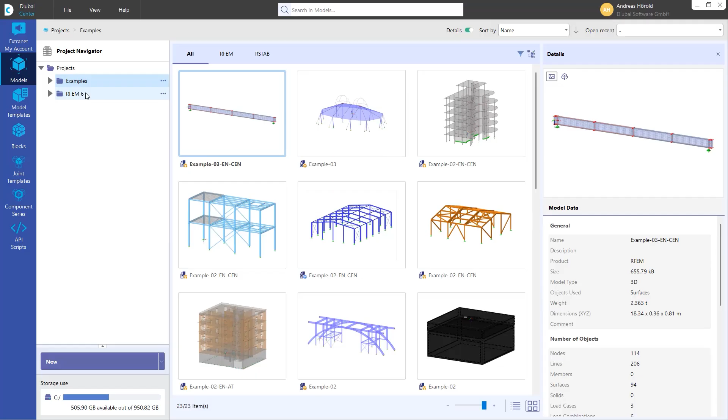Okay, then let's start with the first question. The first question is, how do I organize my projects? I can organize my projects in the Dlubal Center. The people who already work with RFEM 6 know that. I would like to give you some tips and an overview how you can work with the Dlubal Center and news we have implemented in the Dlubal Center. Let's start with the models, the most important tool in the Dlubal Center to organize your projects.

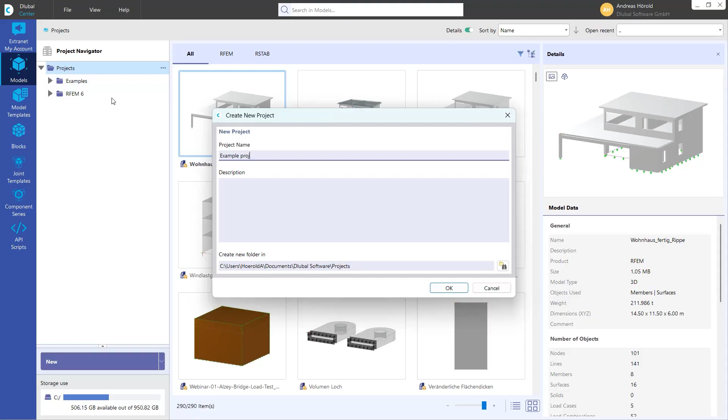Let's create a new project with a right click to projects. I can create new project. Let's call it example project. Okay, that's the new project. And I would like to create a sub-project. Again, right-click to example project, then create new project, and the new project should be model house 1. I can add description here if I want.

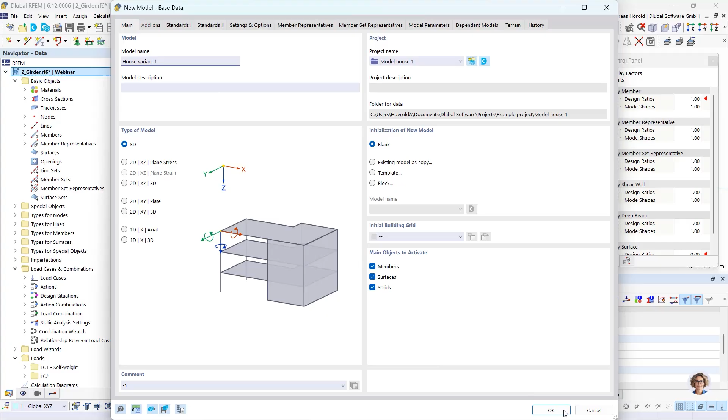So then, again, a right-click to model house, and I create a new file, RFEM model in that case, and I call it house variant 1. Okay. Turn back to the Dlubal Center. Then you can see the file here.

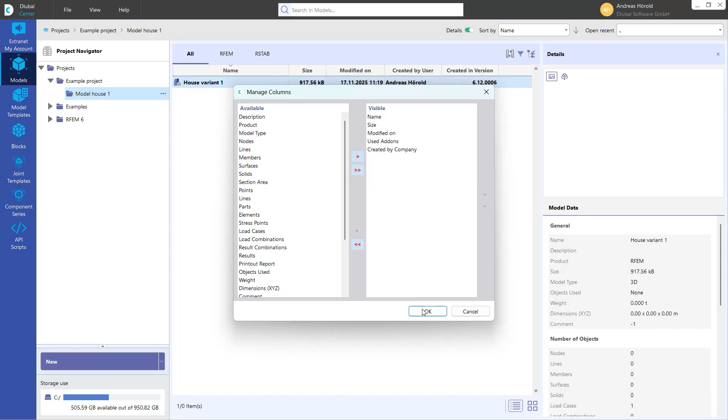And if you switch to the list, you can add different columns here. For example, created in version, created by user, or I can remove them with a double click and can add used add-ons or modified by company or created by company as you want. Different types are available. Now you can see the added columns here.

Okay, then I can open, for example, for the example project with a right click the folder location, and the Windows Explorer was opened. And I can create a new folder also here. So with a right click, new folder, and I call it model house 2. Okay, I decrease it a little bit so that we can see both.

Okay. And now I can do a right click to this example project and select connect folder as project. And I select this Windows folder. Okay. And now there are 2 sub-projects. That's another possibility to create a project. Then I can also do a right click to model house 2, for example, and select disconnect. Then the project was deleted here, but not in the Windows Explorer. It's also a small tip for you. It remains here. Then other features: delete, that's clear.

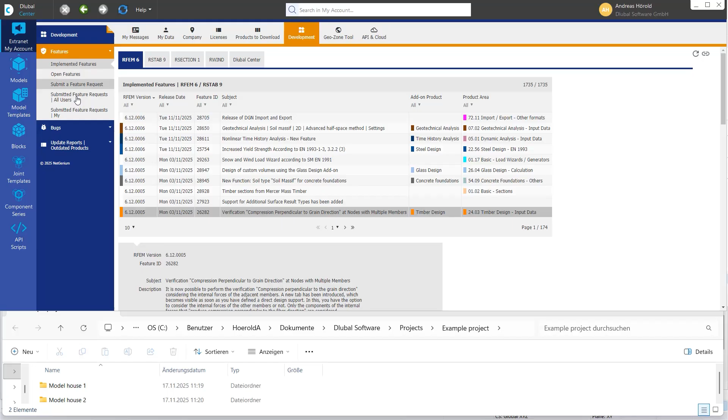Let's turn to the extranet and my account. You can see the extranet messages here, or what's quite important, the development. You can see implemented features in a certain add-on, for example, or you can select all, then you can see all implemented features. You can see open features for certain products or all products. Then you can submit a feature request, and maybe it will be implemented in the future.

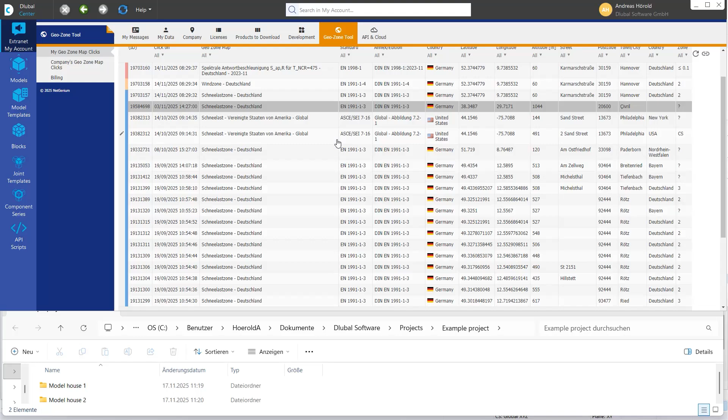Then, for example, you can see the Geo-Zone Tool requests. Those are my requests in the past. Then the API and cloud. Those are calculations from my side from the past. Then you can see here the data of you and of the company, your licenses, and so on.

Then we turn to the models and templates. The model templates category in the Dlubal Center provides an overview of the models you have saved as template files. In my case, it's empty. And an important message: the save as template function in the file menu in RFEM allows you to save your current model as a template.

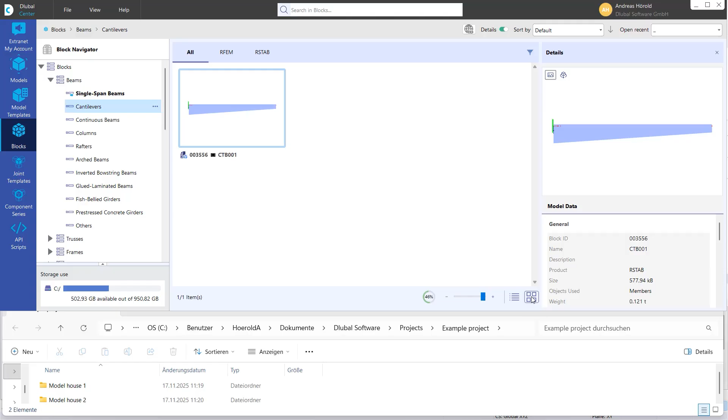Then you can see the blocks. Those are parameterized, and most of the models where parameters are implemented. Let's go to this view, the tiles.

Simple models and more complex models, for example, curved surfaces and so on, concrete structures. A lot of blocks are available. Just use them. That's quite easy to handle.

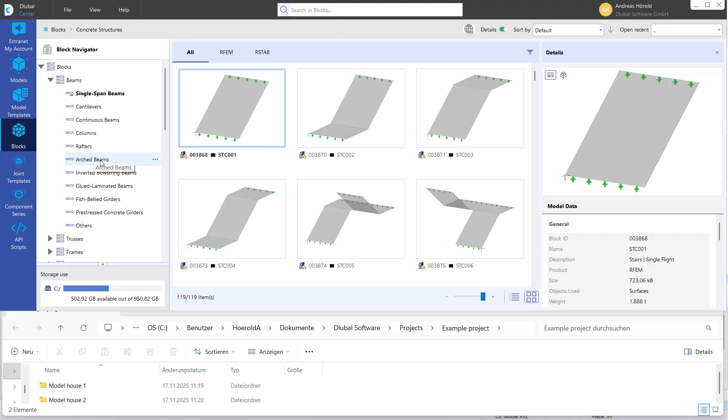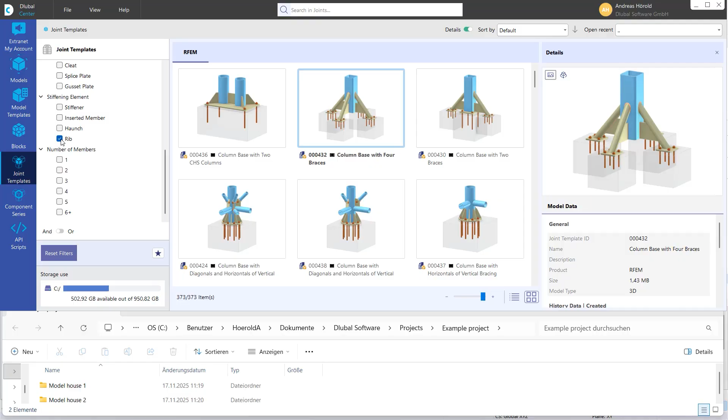Then the joint templates. You can select certain templates of joints. You can use them in the add-on, also in the Steel Joints add-on, for example, also number of members, or joints with ribs, cleat, and so on.

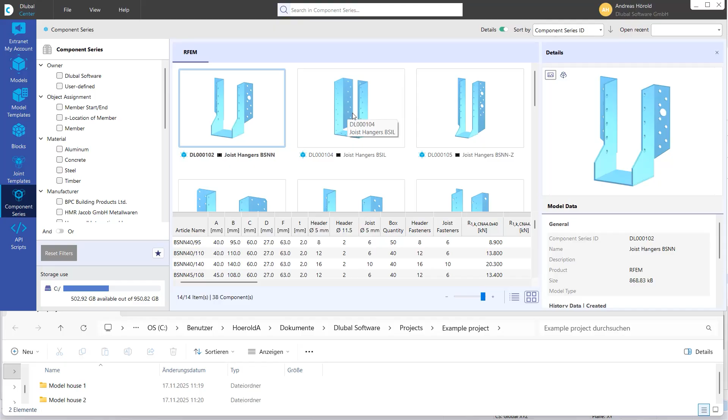Then that's a quite new part of the Dlubal Center, the component series. We are in the development of the new add-on components. It's currently in alpha version, meaning it's in preparation, and in the future you can use the values of such joints and compare your internal forces with the maximum forces of the joint.

And API scripts, there are already sample scripts that you also can use for your project. Okay, that should be all for this question. Let's turn back to RFEM.

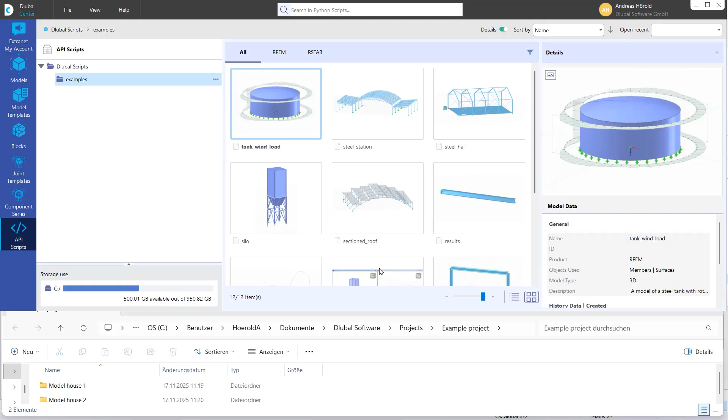The next question is, can I design longitudinal fillet welds according to Eurocode 3, Part 1-8 in RFEM 6? Yes, that's possible now. Soon we will release that feature, and I can show you how to do that. I've prepared a simple single span beam here made of a cross-section HE 180A. Imagine you need to use a girder with a maximum height of 175 millimeters.

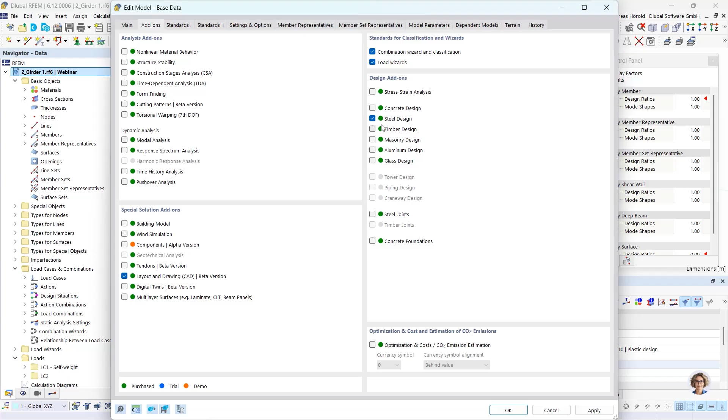It's not possible, as you can see on the design ratio, with the HE 180A, and it's also not possible with an HE 180B. That's why we create a welded cross-section. At first, I go back to the base data. It's necessary to activate the steel design for that feature.

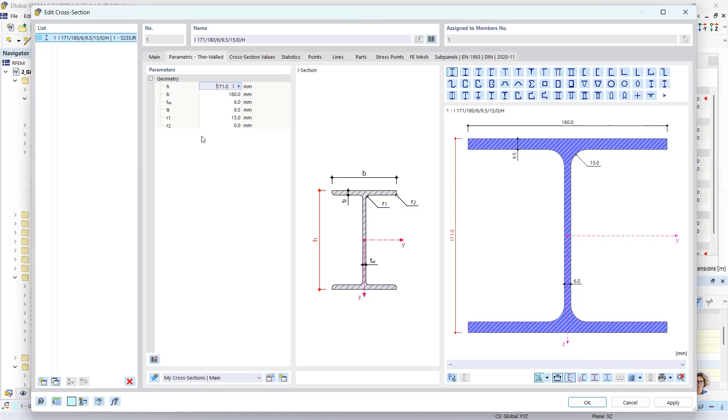Then we create the welded section. I edit this used section. I turn to the library above and I select welded I-section. Before I enter the geometry, I go back to the main section, and I select here welded. Okay, then I enter the parameters. Maximum height should be 175 millimeters.

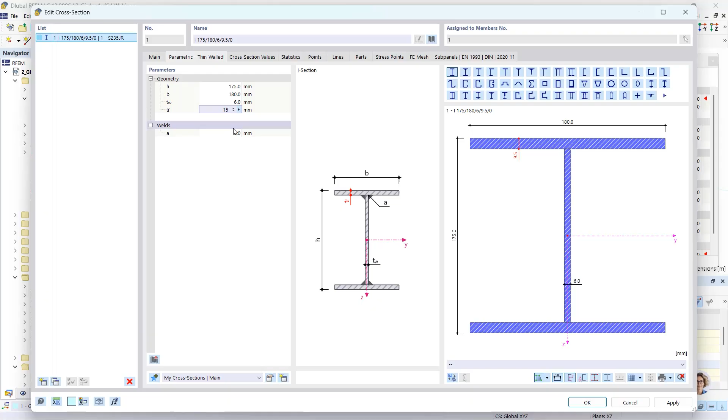The other values can remain, but not the thickness of the flange. It should be 15 millimeters, and the weld should be 3 millimeters. Okay. Then I have to activate the weld design.

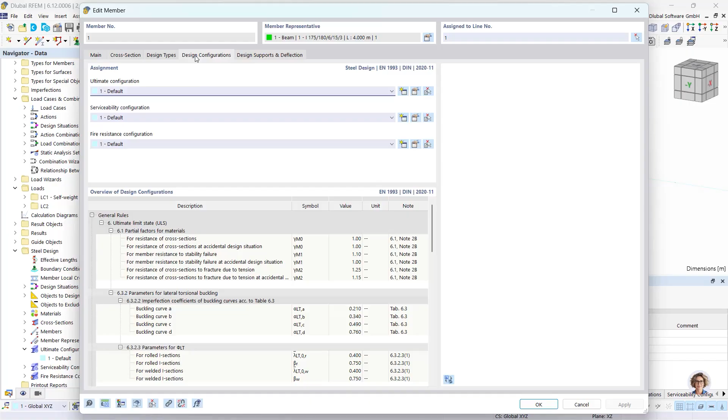I turn to the navigator data, then steel design and the ultimate configurations, Default. I can turn to that chapter also when I double-click on the beam. Then the design properties are activated and I can find the design configuration here, and I can edit it with that button. Then I have to activate the design of the longitudinal fillet welds.

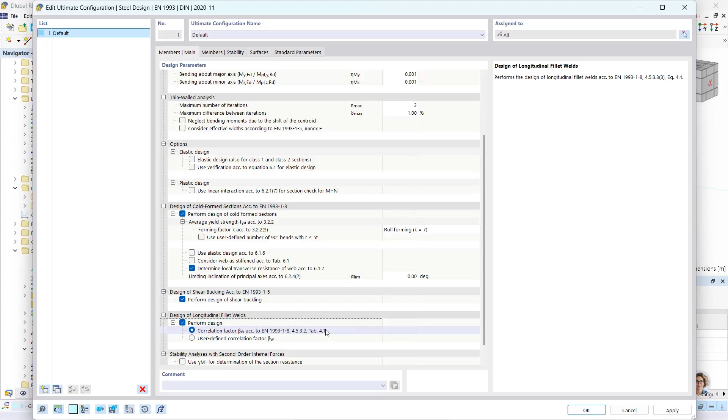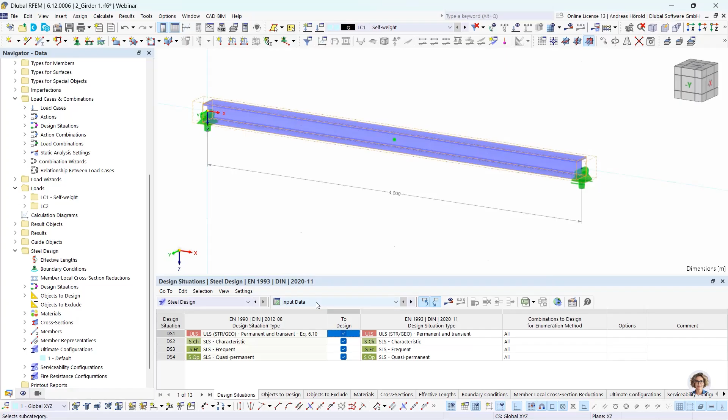The correlation factor should be determined according to the Eurocode. It's dependent on the material, and in our case it should be 0.8 because we have a material S235. If you want, you can also use a user-defined correlation factor. In most cases, we will use the automatic determination according to Eurocode. Okay, so then I start the steel design again.

The combinations are calculated in parallel. Let's turn to the design ratios on members. You can see there's an error. If I double-click on the line, the details are opened and you can see the throat thickness of one or more longitudinal fillet welds is smaller than the limit according to Eurocode 3.

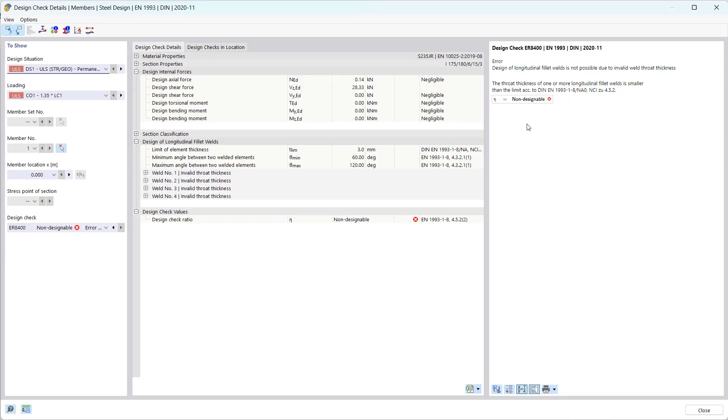Now the program checks that automatically. In that case, the weld is too small, and we need to increase the weld. So I turn back to the navigator data, double-click on the cross-section, and increase the weld to 4 millimeters. Okay. Then I run the steel design again.

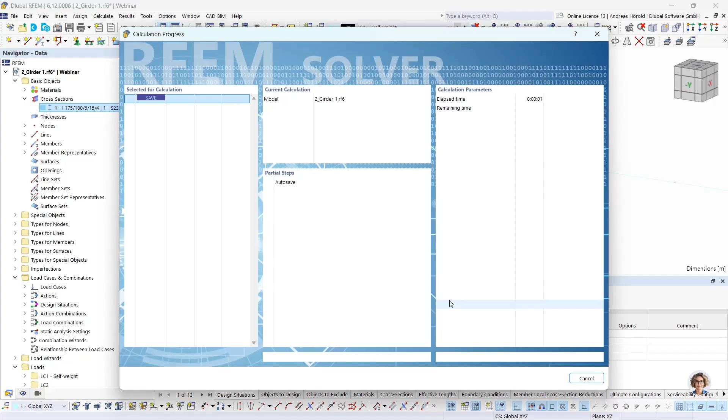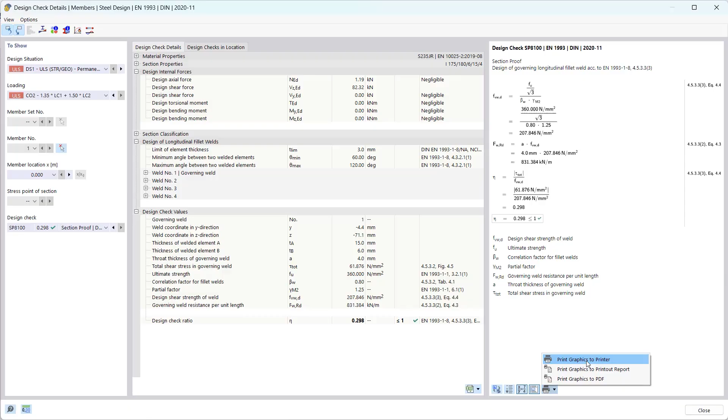And now the design of the weld is done. Double-click on it and I can see the design checks. We can find the 0.8 here, the correlation factor, then the thickness of the weld, and the design check ratio is approximately 30%. And of course, you can also print the formulas in the printout report. Okay, that should be all for this question and this model.

The next question is, how can I smooth results in RFEM 6? That's an often asked question. You can do that with a surface results adjustment. In RFEM 5, we called it average region. Such a surface results adjustment describes an area in the model whose graphical results are not represented by the actual diagrams, but as mean values. You can use a user-defined adjustment area to evaluate the smoothed surface internal forces.

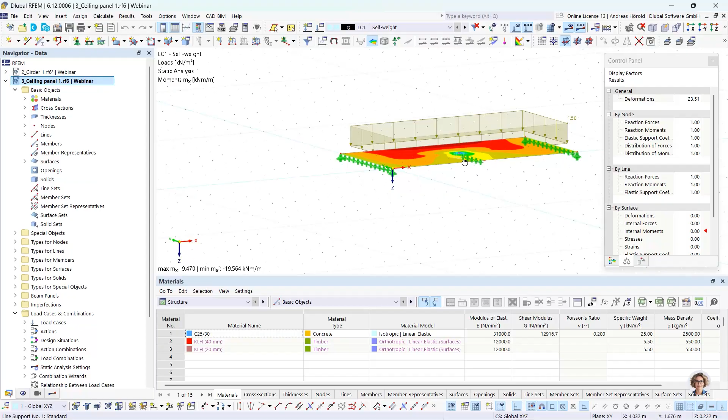You can see that ceiling panel here and a wall here. Imagine it has a thickness of 20 centimeters. And you can see there are singularities at the end of the wall here. We would like to use such a surface results adjustment to smooth the results.

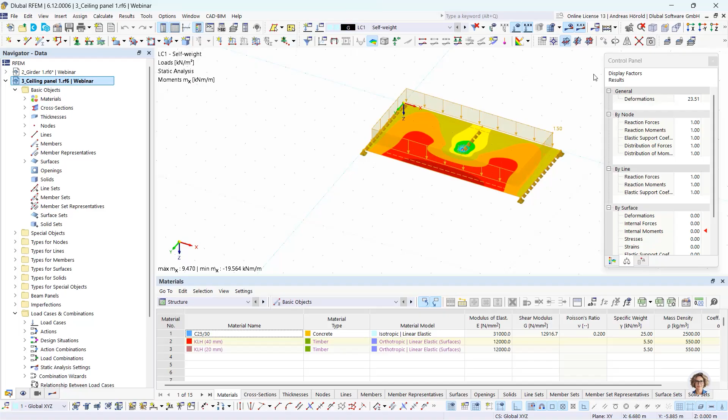To compare the results, I copy that ceiling panel, select all, then I use the move and copy function, create a copy, 6 meters in Y direction, and including loading. Okay.

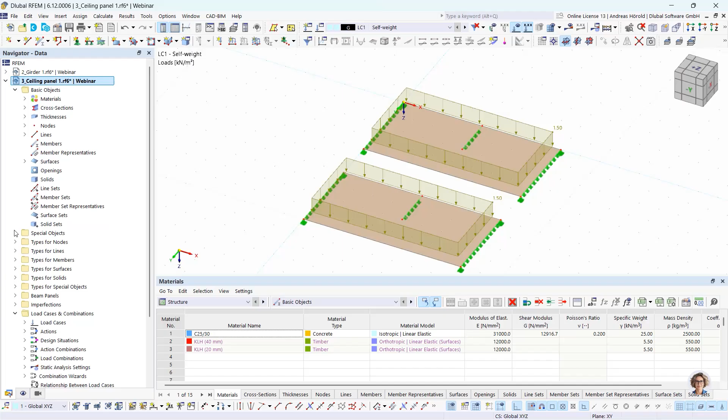So then I turn to the navigator data, and under special objects, you can find the surface results adjustment. You can also find them in the menu under Insert, Special Objects, Surface Results Adjustments, and I open the dialog box.

At first, I have to assign a surface. That surface, okay. Then you can select different shapes here: rectangle, circle, ellipse, and polygon. I use rectangle. The dimensions in our case should be 20 by 20 centimeters. And I select the node.

And to define the position correctly, I move it to 10 centimeters to depict the wall end correctly.

So, and then there are different adjustment types. The default setting is for direction u, averaging of mx, my, and so on, for basic internal forces in surface direction y. And the second line here is the default setting for basic internal forces in surface direction x.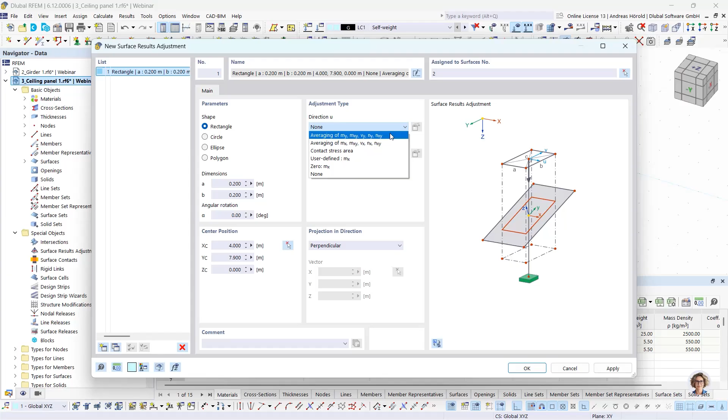So I use the default setting, press OK. And then we calculate all again.

And let's compare the internal forces for both slabs. The maximum value for both is 19.5 or minus 19.5 - the mx internal forces in that case.

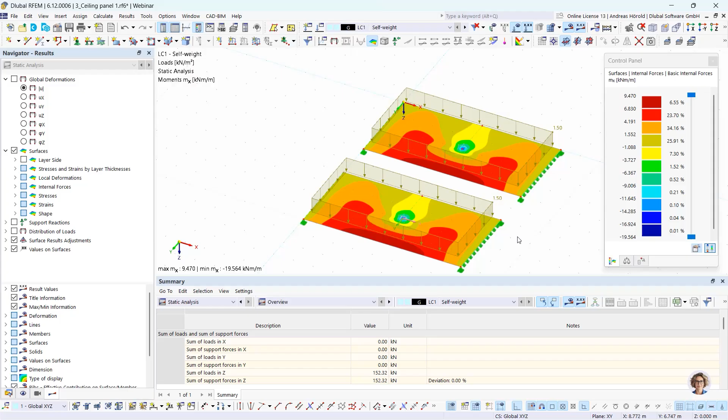And if I want to see what the maximum value is here, I can, for example, deselect that slab and hide selected objects. Okay, and now the maximum value is minus 16. That's the possibility to smooth results in RFEM 6.

Okay, those are the first three questions.

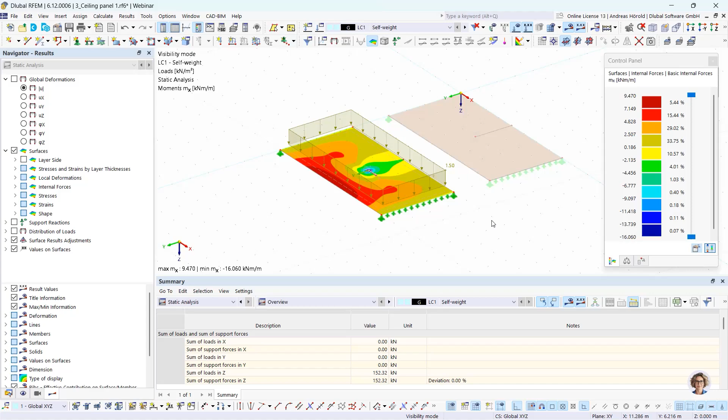Thank you, Andreas. I will continue with the next topic. The next question is: where can I find specific RWIND settings in RFEM 6.12 and later?

As you have maybe already realized, we changed the GUI in RFEM 6 a bit to be able to hand over more data to RWIND with the GUI in RFEM 6, without stepping directly into RWIND.

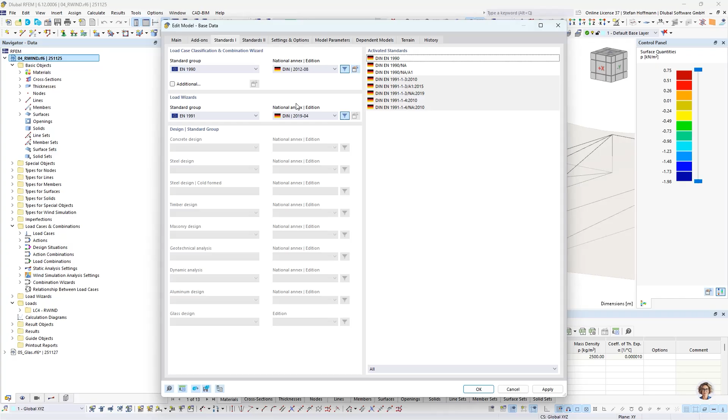Let's start with the basics. So usually at first you activate the add-on wind simulation, and you can choose the standard group for your wind profile in order to determine your automatic wind profile for your region.

If you're already interested in adding a terrain to represent your location-specific behavior of the wind, maybe by trees or some mountains, you can already activate a terrain in the base data terrain settings, and you can choose between no terrain, of course a horizontal plane, an inclined plane, some table values, or, as I am using, and this is most likely also the first change, an IFC file.

Model objects - this is no more found in the mesh settings to adjust the IFC as a terrain. You already input it as the base data in the tab of terrain. So I'm simply using an IFC file where I've modeled a simple shape of my terrain, and you can do some more inputs on the size of your terrain already here.

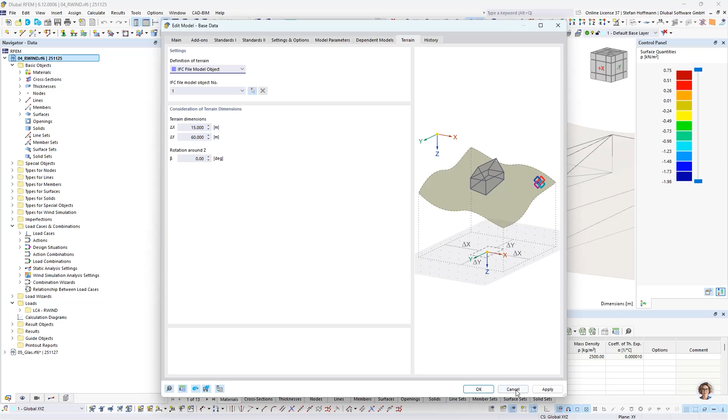So if we jump into the model, you are of course aware that in the mesh settings, you have a tab of wind simulation, and for the regular customers, you already realize that this tab has changed a lot from the GUI. So we moved some parts, and you now have the option to assign objects from shrink wrapping.

So the shrink wrapping mesh, which is later necessary for the calculation in RWIND, in order to be assigned to your main structure or surrounding objects. So you can already split it over here, but later on also in the objects. This is currently not in use.

You can as well choose to activate the terrain, which we set in the base data, to be considered for the calculation. You can also jump into the base data. You can moreover, as already known, adjust the level of details for your members. You can choose to close hollow sections. You can consider a surface thickness in general already, and the two known options to keep our wind results if the mesh is deleted, and or to run RWIND in the silent mode.

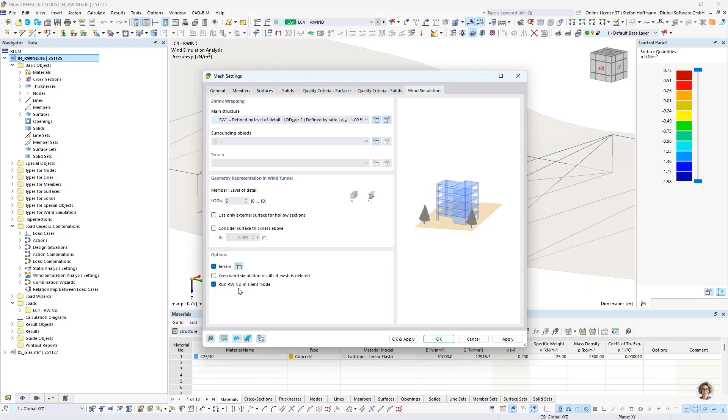As known, you also have settings in the load cases from the analysis type wind simulation. So if we jump into the tab, this has not changed, I think, a lot. You can assign wind simulation analysis settings, where you can, for example, differ between steady flow and transient flow.

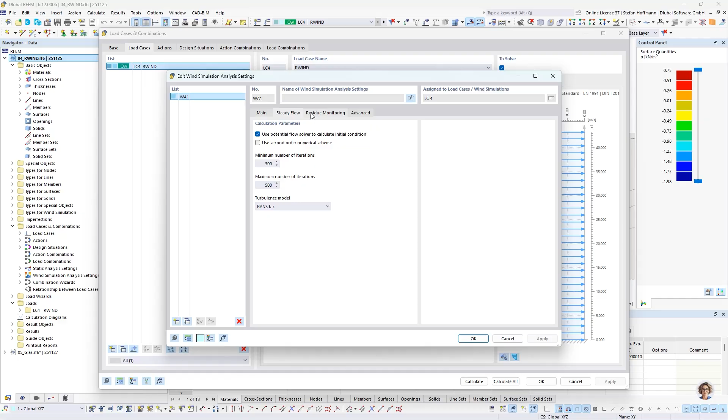You can hit some more options to be handed over to RWIND. You can also step into the tabs to add some more input for the wind tunnel. The wind profile did not change from my point of view, so you can simply assign a wind profile according to a standard and hand this over to RWIND directly. Some more checkboxes at the bottom. Everything is usually explained in more detail in our online manual.

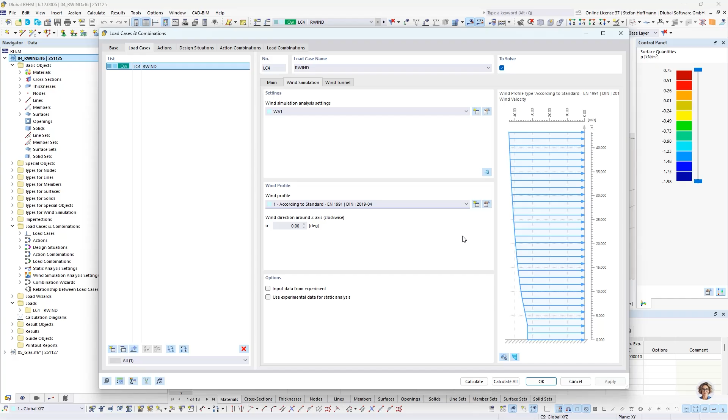The biggest change, in contrast to the mesh settings, is that now every object, if you click it, has a specific wind simulation setting which you can activate. You can see that you can now assign different shrink wrapping settings for surfaces. So if you have a small surface, you can assign an even finer mesh later on, because you're interested in facade engineering and results at that point. And if you have a bigger surface, which is not of as much interest, you can assign a coarser mesh.

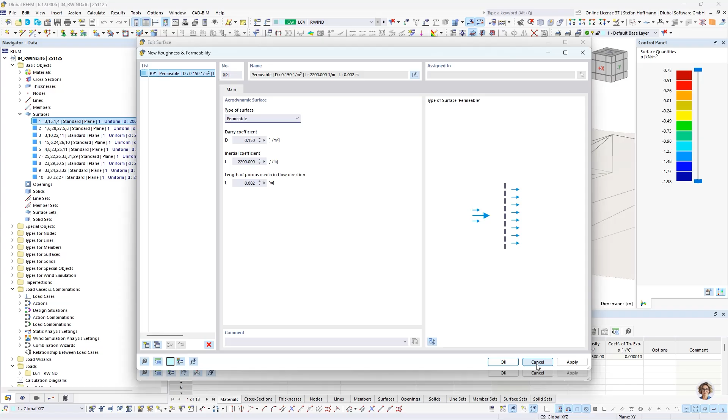You can also define the roughness and permeability of an object. As you may already be used to in our wind feature, you can use a closed surface and enter permeable options for it, so the mesh will not be fine but will be considered as permeability later on. You can also check to consider surface thickness, and another interesting option is that you can simply exclude this object from the wind tunnel.

What we did not change is that you still have your wind simulation analysis results, and you can still split to show it on the original model and/or the computational model.

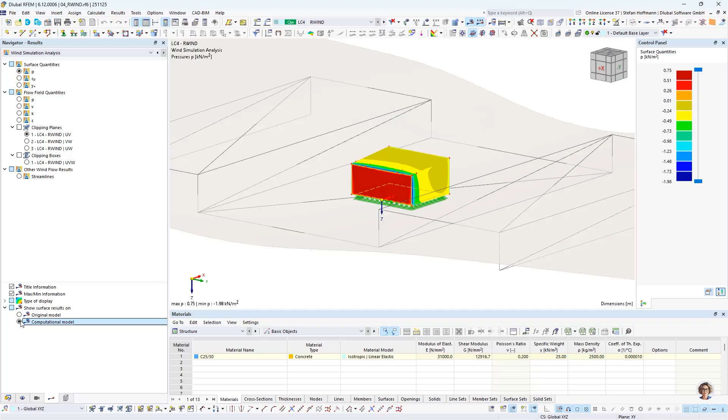We will step to the next question.

The next question is: can I control the shear coupling for laminated glass in RFEM 6? Usually, with laminated glass, shear coupling is of interest, because if you have a layered pane with two panels of glass and one foil in the middle, one worst case is that you do not take the shear coupling into account, resulting in big deformations and stresses only in the glass panes. But it might also be of interest, since we use laminated glass, to take the shear coupling into consideration.

Sometimes you are allowed to do this. With regard to the German standard 18008-1, it offers two requirements in chapter 7.2.1. It mentions that when determining the stress and deformation of laminated glass and laminated safety glass, favorable shear coupling between the individual panes must not be assumed. But in the next chapter, 7.2.2, in the case of unfavorable shear coupling, e.g. in the case of restrained stresses, full shear coupling must be assumed.

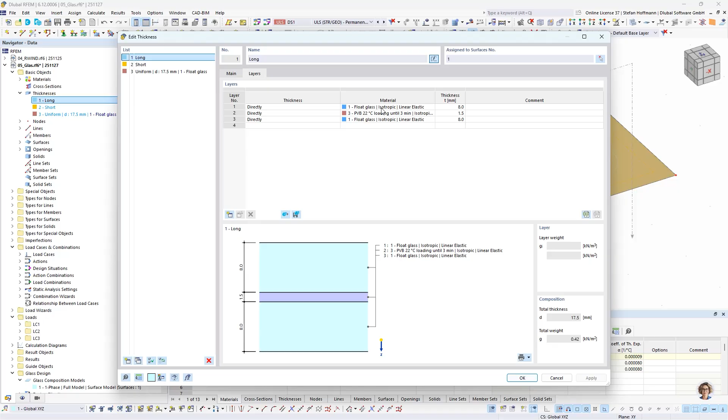First, a quick look at our model. It's a glass pane with 4 point supports, and I have created a thickness from the type glass composition. I have 3 layers: 2 times float glass, 8 millimeters each, and 1 foil in the middle. You can use the foil with material values from our material library. I'm using a foil with a load under 3 minutes, so the E modulus will already change for our foil layer. And this is my glass composition.

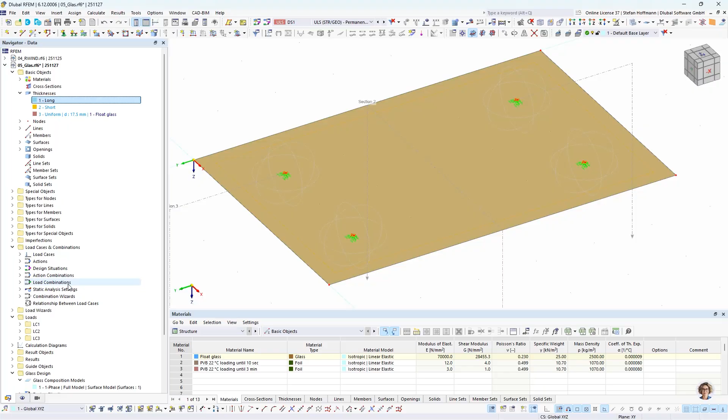For the calculation, you have to assign - or this is usually assigned automatically - a glass composition model, where you can later also choose a solid model to take into account insulated glazing. But currently you can differ between coupled and uncoupled shear coupling between the glass layers. I have defined uncoupled, so there is no shear coupling in my main model.

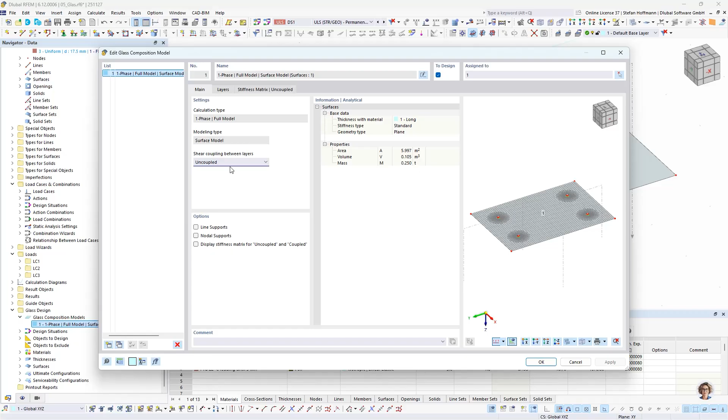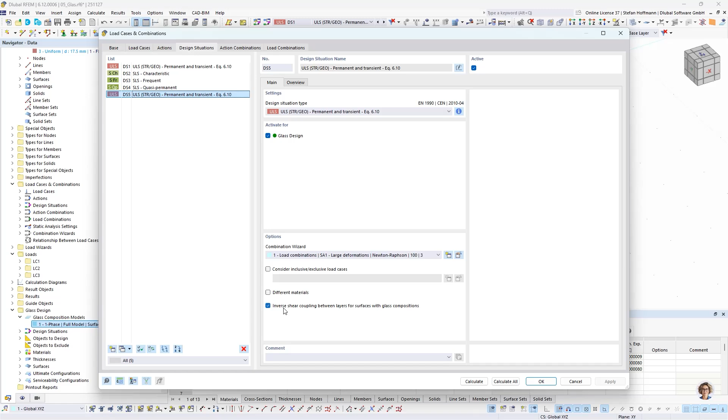So how do you consider both shear couplings? It's quite easy in RFEM 6. We do this by checking our design situations. Once you check glass design, you can see a further added option at the bottom of the design situations: inverse shear coupling between layers for surfaces with glass compositions. Remember, we have a glass composition model without shear coupling, so for every load combination in design situation 1, if we do not check this checkbox, this is uncoupled. We can simply copy this design situation and check this checkbox for the same load combinations, where we will then take into consideration the full shear coupling. Just by adding this option, load combinations will be calculated automatically.

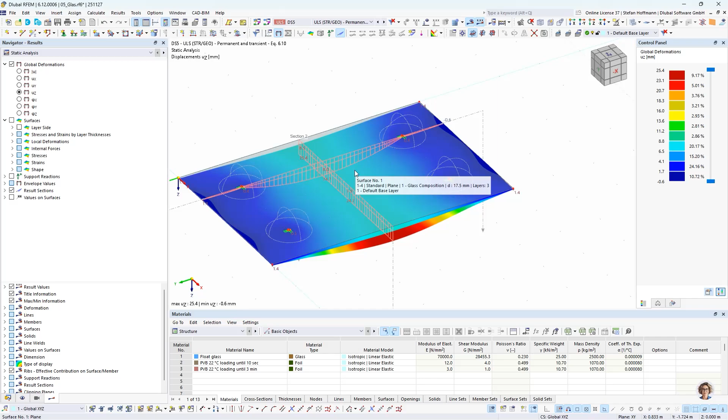Once we step into design situation 1, no shear coupling, we have a maximum deformation of approximately 50 millimeters. If we step into the one with full shear coupling, the deformation reduces as expected, related to the theory behind our 2D sub-stiffness. The most interesting part is, of course, the glass design. I have done 2 sections through the model, and we are above our design ratio, so we would have to adjust our model. But mainly, not taking into consideration the shear coupling, we would expect on point supports to have the biggest ratio in the middle of the field, but this would decrease once we take into consideration the shear coupling.

This affects most likely our support points with point supports, so the stress ratio may increase. It's not only in the case of restrained stresses, but from my experience you can also expect that stresses may increase with a full shear coupling at the place of point supports. You can take this into consideration by simply activating this option in the design situation.

Let's step to the last question for today. We will stay in the model. The last question is: my mouse is not working as usual. What can I do? Let's reflect on the mouse function.

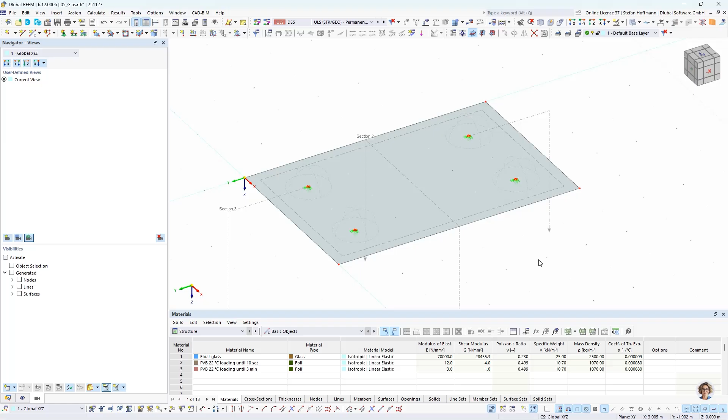With the left mouse, you can select items. With the mouse wheel, pressing it down, you can pan. With the right mouse, you usually get a context menu with some options. If you hit Control on the keyboard and press the middle mouse button, you can rotate. If you select a node or object first and hit the Alt key while pressing the middle mouse button, you can rotate around that object. And you can move, of course, with the middle mouse.

What happens if you only have a mouse with one key, or if you are at your laptop where you do not have a middle mouse button? We introduced this option over here to move, zoom, and rotate. If you activate this, the mouse action will change.

With left mouse clicking, you can move. Holding Shift, you can zoom by moving the mouse and clicking the left mouse button. And with Control or Alt, you can rotate by simply clicking the left mouse button.

So if you cannot select something and it's not working, remember that this option might be active, and it also affects the view cube, so it's not fully functioning anymore. If you are confused, remember this option, uncheck it, and you have your normal mouse options back again.

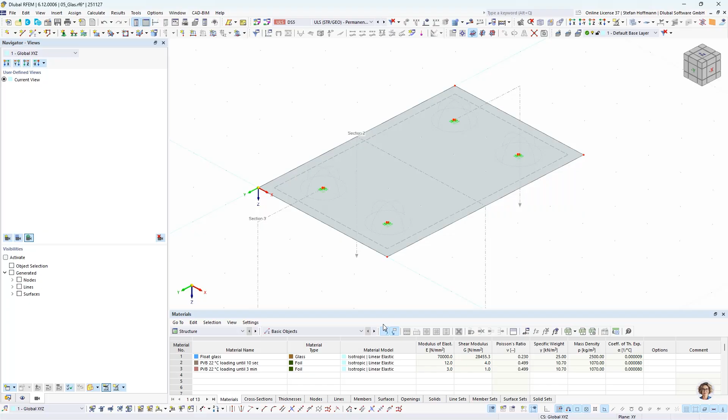The last two buttons I would like to add to this topic are these two. Both allow you to interact with the model and the table. As we had in the glass design, if you have results and click in one row, you will see a red arrow pointing at the place. If this is not the case, or if you click on one node and it is not highlighted in the table, remember both buttons, since they should be the reason why it is not highlighted, and vice versa.